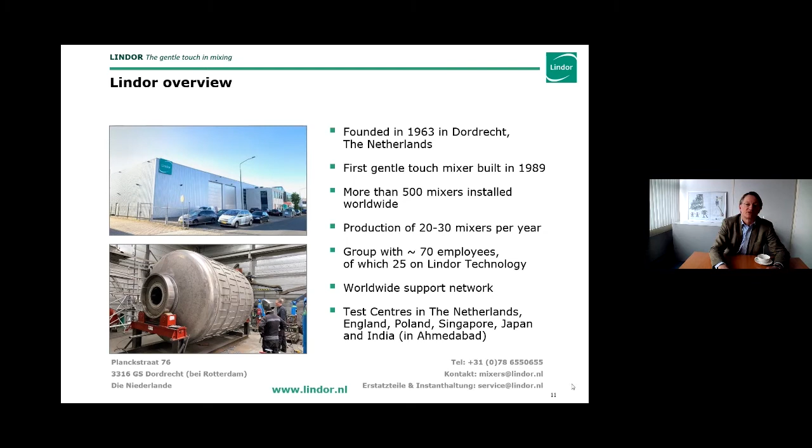What we do is cater to the food, chemical, polymers, and pharma business. We've actually supplied to all of these industries in India as well. We do flavoring, mixing, liquid dosing like impregnation, drying, vacuum drying, hot air drying, dry air drying, vacuum coating. We make mixers from very small, 10 liters - call that a 1 to 3 kilo batch - to 25,000 liters, which is like a 15-ton batch.

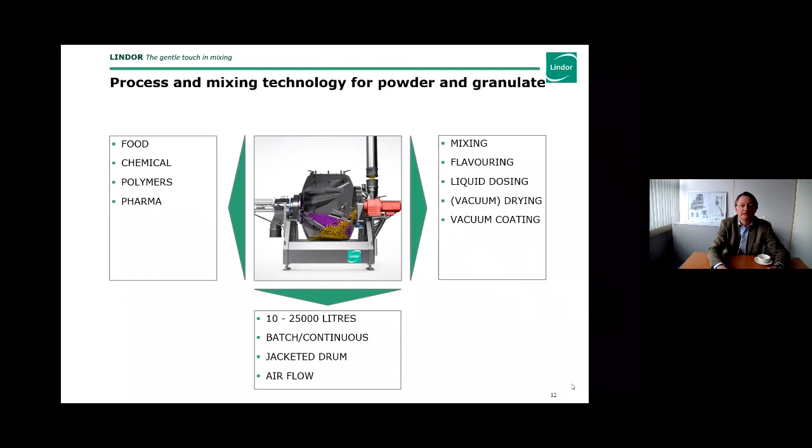We do continuous mixing and batch mixing. We have jacketed drums, airflow, etc. This is a typical, quite large mixer, I must say, 7,000 liter batch, just to give you an impression of how it works. It's a rotating drum, so the entire drum rotates. There are no moving parts inside. The product in this case is entered through the standing pipe on the right-hand side and leaves the mixer after the batch on the left-hand side.

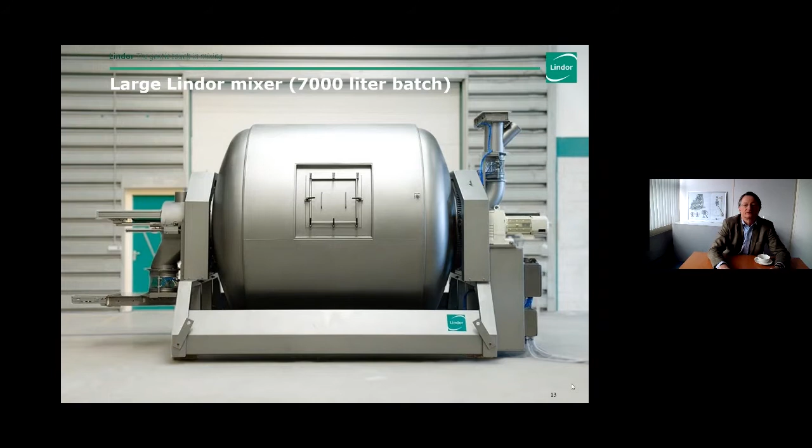So now to the presentation that I prepared specifically for this webinar: Integrity is key - Gentle mixing and flavoring of tea, a webinar for India and surrounding countries like Sri Lanka, Bangladesh, and Nepal. Tea and herbal teas, it's one of our key points in doing business.

More than 50% of all our mixers installed worldwide are for this purpose alone. Sizing ranges from a 70-liter batch to 12,000 liters of batch - that's the biggest machine we've ever installed, located in Poland, at a tea company there. We install them in Europe, and of course in India, where we've now installed around 25 mixers, not all for tea - I think it's about 8 mixers for tea, so about a third. Also Canada, Russia, Dubai, Indonesia, well, all over the world.

Talking about big batches, normally a tea mixer, the most common sizes are like 1,000 liter, 1,500 liters, 2,000 liters, and then 4,000 liters is also a popular size. One mixer was ordered as a 12,000 liter mixer that, accounting for their bulk density, comes to about 3.6 tons per batch, which is equivalent to 1.8 million tea bags if you have these single serve tea bags. In 24 hours, if you run around the clock, that would equate to 130 million tea bags in 24 hours. So in a week's time, you nearly can give the entire nation of India a cup of tea.

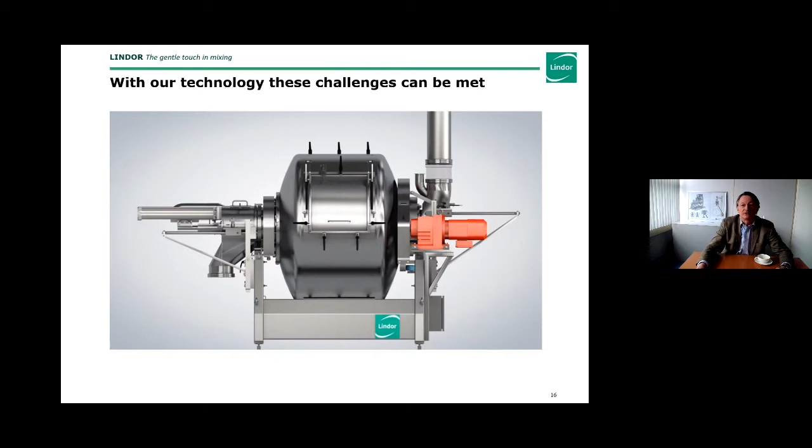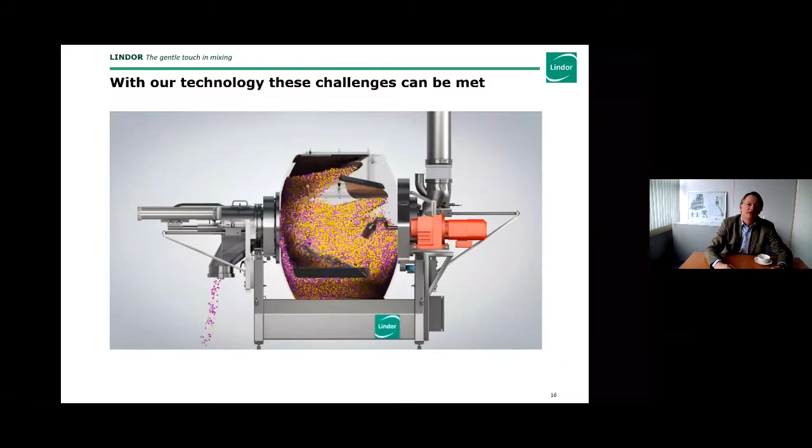So what you see on the right-hand side, the standing pipe - you see the purple powder coming in, or particles, and the yellow now coming in, and the two are mixed through this rotation effect. And after the batch, this is done very shortly just to show you, the actual product leaves the mixer on the left side.

The rotating drum is actually pumping out the particles. And because everything is always participating at all times, that results in a discharge rate of well over 99.9%. So typically less than a handful, or less than 100 grams of product, is left behind in the drum.

What you also see in this mixer is the liquid injection nozzle or device, a swan neck we call it, an armature. So there's a device in here which is the nozzle, and that can be single phase or dual phase. If you have thicker flavors, a dual phase, and through that you can spray in on the tea leaves.

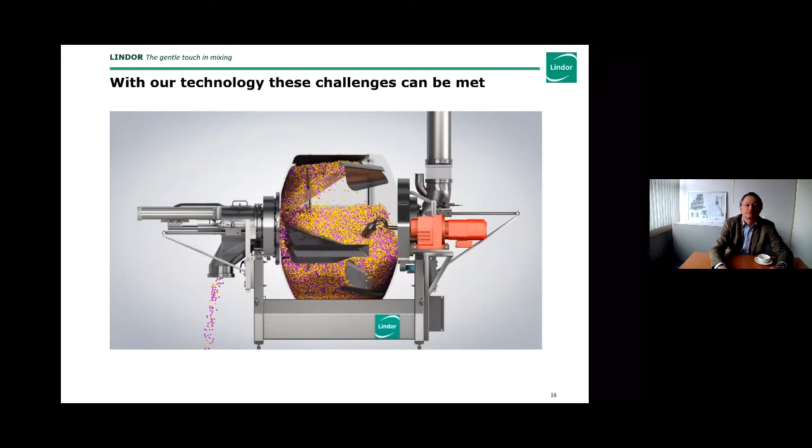Doing many trials with customers, having supported many installations with tea packers, several themes have emerged, and I've made a selection for you to discuss these.

So point one, long leaves, entangling and breaking. You have many, as you know much better than we do, different types of teas. Some are kind of easy to process, and some types are harder to process. Some of these are like needles, long needles of tea, and they can be pretty difficult to do. The second one is that sometimes other components are added to the tea, like blended teas, mixed teas with flower petals or other herbal ingredients, which may be difficult to mix.

Then there's the whole subject of dust generation and what to do with dust, which is the fourth topic, venting and dust extraction. Then flavouring, how to do that best. Sixth thing is, after the whole thing, how do you properly clean, and how do you deal with allergens? Allergens is a topic that more and more in our society is popping up and becoming an issue. And then last but not least, how about productivity?

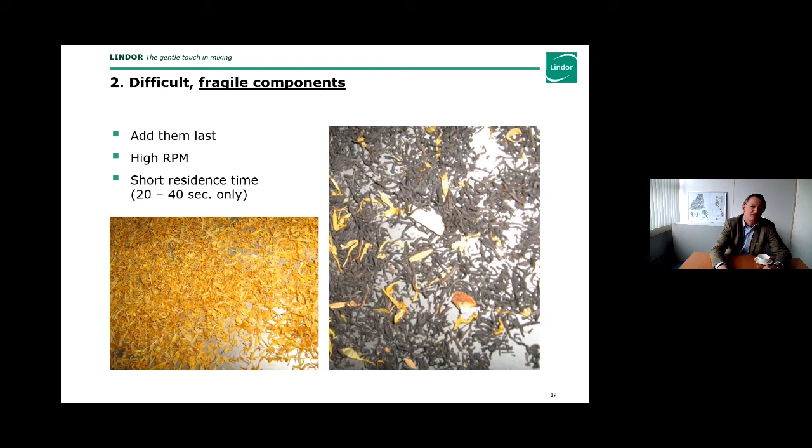The third one is dust generation, and you can have this with leaves, with broken tea, fannings. Again, because of the lack of shear forces in this mixer, the actual breakage and generation of dust is very, very low, especially if you stick to the normal mixing times. The normal mixing time for just dry tea, besides flavoring, just dry mixing of tea, is about 2 to 3 minutes typically.

Sometimes due to operational reasons, you want to continue to keep it in motion. Then you slow down the rotation of the drum to give it as little disturbance as possible, and then you can rotate for 10, 20 or even longer minutes. And still the amount of dust generated is very, very low or negligible. But the more you can avoid it, the better, of course.

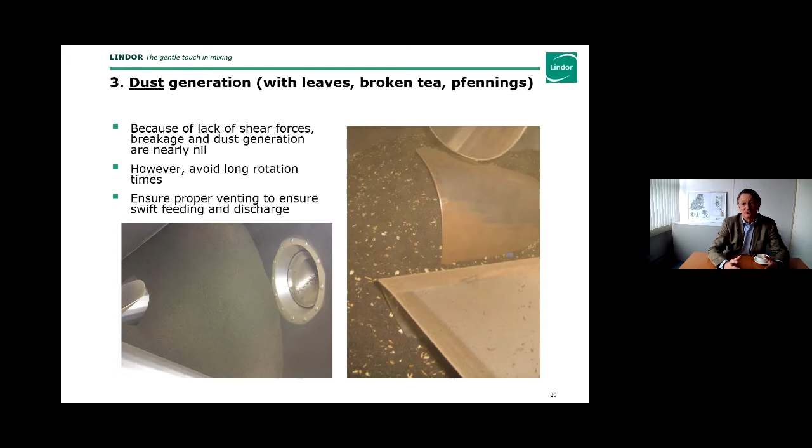What is important, and in the next slide I will show you, is the proper venting, because although the mixing system itself will not generate dust, the tea will come in with a certain amount of dust due to previous operations, or just because it is there.

So how to deal with dust and venting. When you have tea coming from a big bag, a silo, or a hopper, and you feed it in by gravity into the mixer, the tea is going to replace the air in the mixer, and that air has to go somewhere. If that's blocked or not properly installed, the tea can actually be blocked from coming in because the air is trying to push out but cannot go anywhere.

So we've made a special flange, a special connection for that, where you connect a pipe or hose to let that air freely escape. A nice solution is to connect the venting connection on the inlet of the mixer back into the feeding hopper, so the air sucked in due to the dropping of the tea leaves comes in from the mixer again. This way you create a closed system.

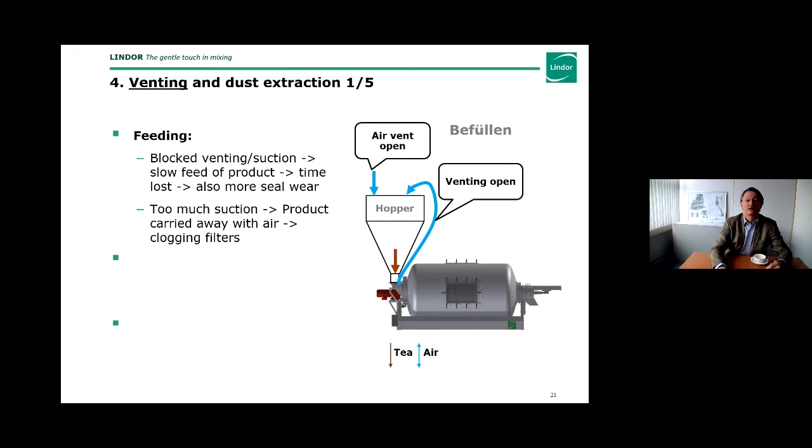You can also install a dust extraction system, which has a sucking effect, but you have to be careful not to suck too hard, because then you will suck tea with it too, which can clog up your filters. So too strong suction is not good - you can carry away too much product.

Then during mixing and flavoring, you want the mixer to be able to breathe. So there should be an open air connection, preferably back to the hopper. Also, if you inject liquid, that's also replacing air, even if not as much as with the entering of the tea. You need to make sure air can flow out with the introduction of the liquid you spray on.

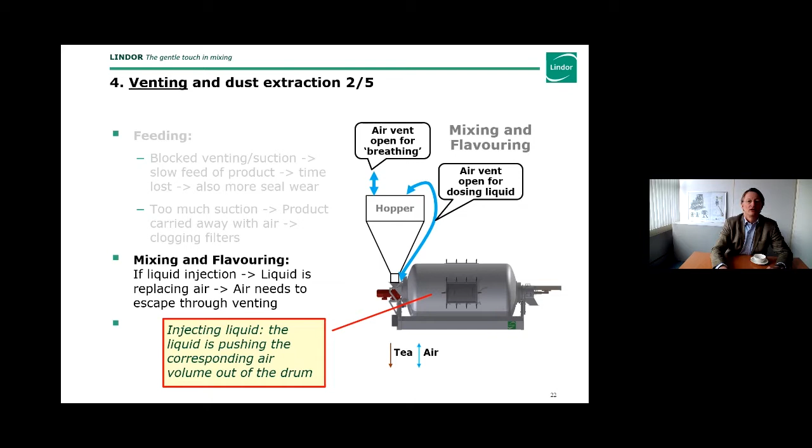The third point is during discharge. When your batch is ready, after 3, 5 minutes, you want to discharge like I showed you in the simulation, but as the leaves leave the mixing drum, air needs to go back in. You have to make sure air can freely move in so the tea can easily leave the mixer, giving you a short discharge time - typically 1, 2, maybe 3 minutes.

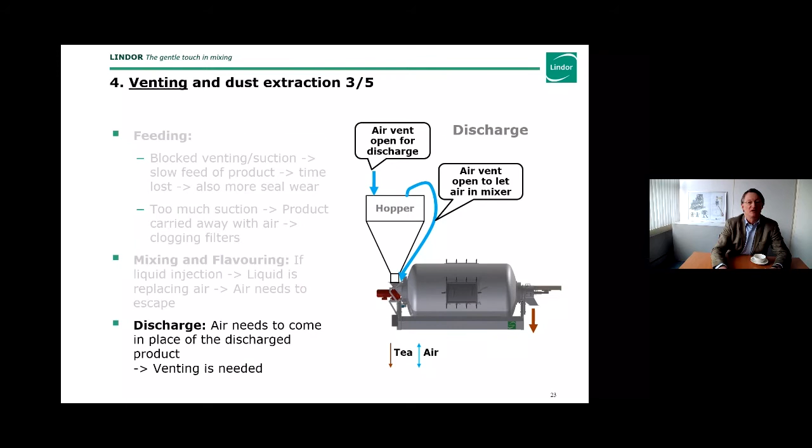Now some practical things and examples of what we've noticed. You learn by doing and by practice - we've made our mistakes, and had solutions that worked and that didn't work. We'd like to share a bit of that with you.

What you see here on the left with the blue circle is one of these venting connections with a sock over it, like a filter sock. It's a very simple solution and can work well, unless the filter sock is not properly attached or becomes clogged - then it's really obstructed and the air cannot flow out. In this case, that resulted in the tea not flowing in properly, taking minutes and minutes before the tea could fully enter the mixing drum. It was so slow in evacuating the air.

Because we could not attach any other system at the customer's connection point - they didn't want anything else there - what we did was introduce some snorkels, as we call them, to catch the air and let it flow out through another port, which was then connected to their extraction system.

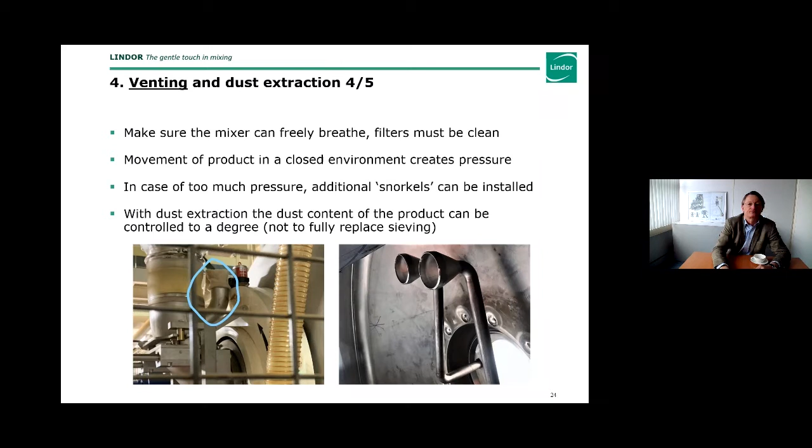To give you an example, this is how strong the air can be during charging of the mixer with tea. This was actually a tea installation in Germany.

Watch these two holes - I opened them. Normally they're plugged, and they're there to place a liquid injection system, a CIP system, or instrumentation. But if it's not there, it's plugged. I opened them to see if this venting was an issue. Watch along these arrows, and you see the air flowing out with force. You can also see dust coming along with it because of the strong airflow and high speed that carries dust with it. I was standing there making the video with a white shirt on, and I can promise you that the shirt was not white anymore after making this video.

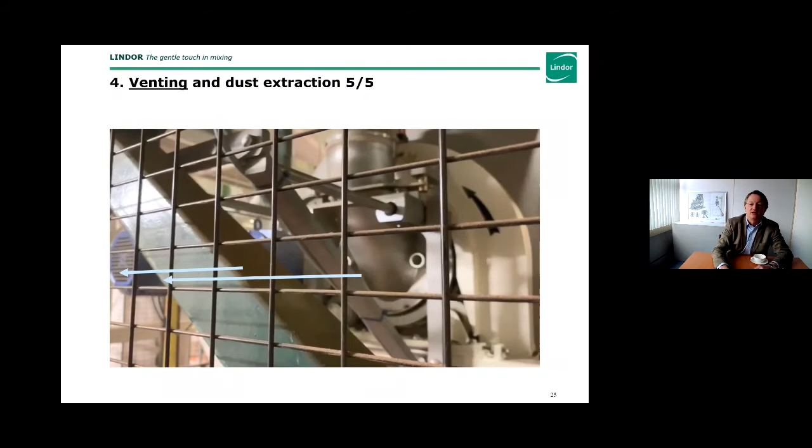Then we move on to the next topic, and that is flavoring. If you want to flavor it, you want to have it homogeneous. When you have some tea in your hands or put it in a teapot, you want it to have a nice and even flavor and aroma, and no lumps and no spots of liquid or anything like that.

You can flavor tea in two ways, apart from having the flavorful tea or other ingredients with their own flavors. You can add to that either liquids and or a granulate. Sometimes it's done both, sometimes it's one or the other.

With liquids, the characteristic is that it can offer a taste and it can offer a fragrance. So if you then open the tea, or even with the tea bag, before you consume the tea, you can already smell it. With the granulate, you have much less of the fragrance, but the taste you certainly have. The taste is actually encapsulated in these granulates, and when the granules hit the hot water, the taste opens up. You can do also a combination of both.

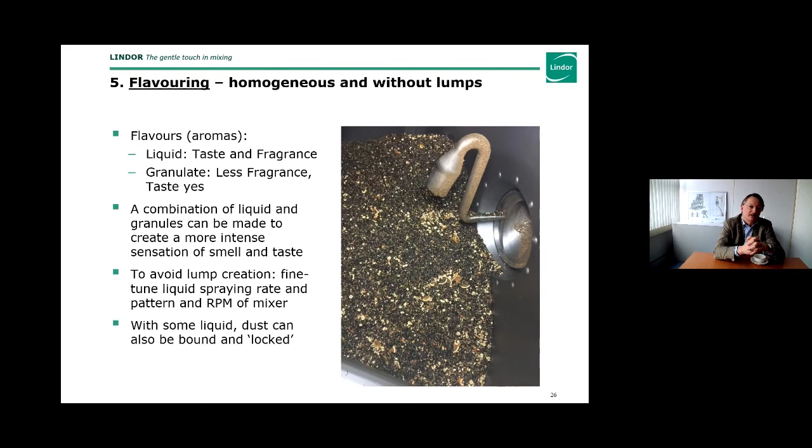Both can be done in our mixers, of course. To avoid lump creation, which is not difficult at all, make sure that you have the right speed of the mixer, not too slow, and a nice fine mist of a spray that can be fine-tuned, spraying only on the tea itself and not on the metal parts in the mixer. That's a matter of alignment and adjustment that we typically do for our customers, so you get an excellent result.

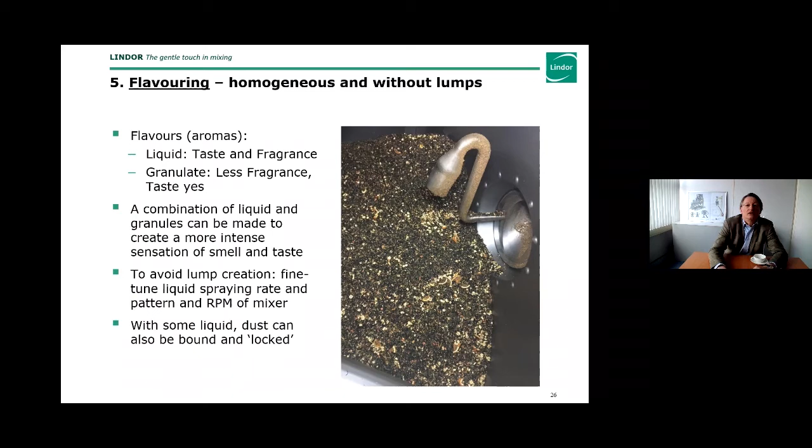Then cleaning and allergens, different ways of cleaning, just light cleaning between batches. If you schedule your tea, it's easier to first schedule the light flavors and the light teas and go stronger and stronger, so that at the end of that campaign you can clean it. Then you can dry clean or you can wet clean.

Dry cleaning, you use a brush, an industrial vacuum cleaner, and we can make a port in the drum where you connect a vacuum hose so that you can wipe or brush the tea in that direction and it's actually sucked out, and you can finish it with wet wipes.

It depends also if you use flavoring, liquid flavoring, then more cleaning is maybe required. Wet cleaning even, you can do it manually with warm water and detergent. Three stages: pre-rinsing, then a detergent clean, and afterwards post-rinsing.

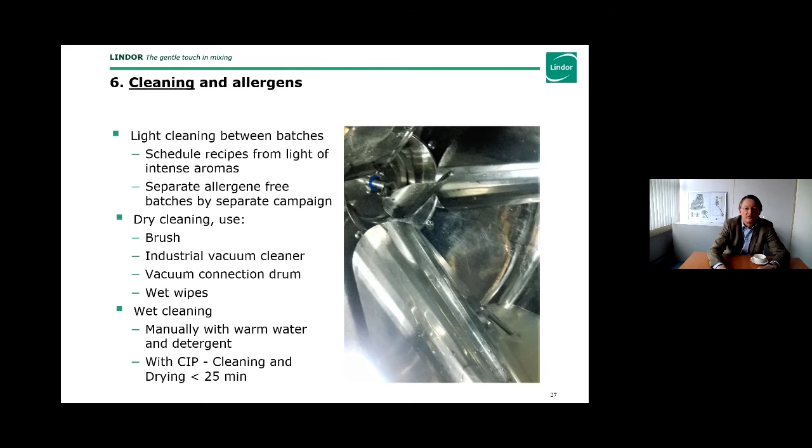Or we can equip the mixer with a complete automated CIP system with spray balls in the drum, in the inlet, in the outlet, with a hot air or dry air drying unit on it. You can have an automated cycle and have the whole thing cleaned and dried within 25 minutes. So productivity-wise, that can be a very good solution.

Talking about productivity, our mixers with our customers do up to 8 batches per hour. It depends also a little bit on the size of the machine. 8 batches per hour can be done by a 500 liter, 1000 liter, 1500 liter mixer. If they become bigger, then the number of batches can go down a little bit. It depends also on the material handling automation before it, how fast you can feed, and how fast you can take away the product that's discharged.

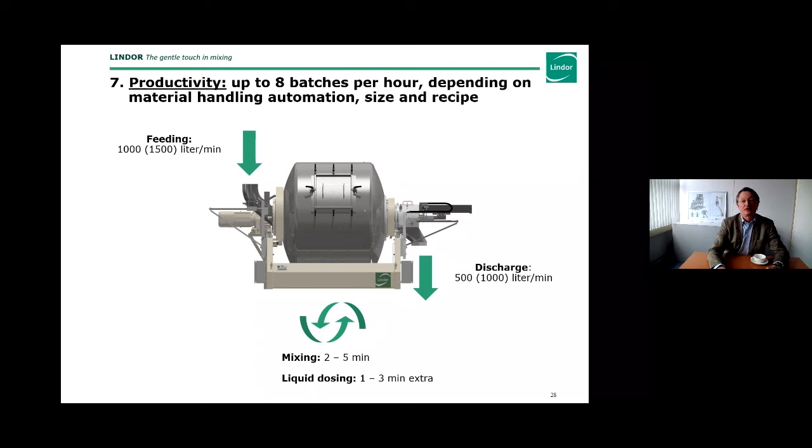Feeding typically goes to the tune of 1000 to 1500 liter per minute maximum. The mixing is typically 2 to 5 minutes. Liquid dosing can add 1 to 3 minutes to that mixing time. Discharge is typically 500 to 1,000 liter per minute. So the mixer can be very, very productive, but it obviously also depends on what kind of line it's built into. And also we can make highly efficient material handling systems.

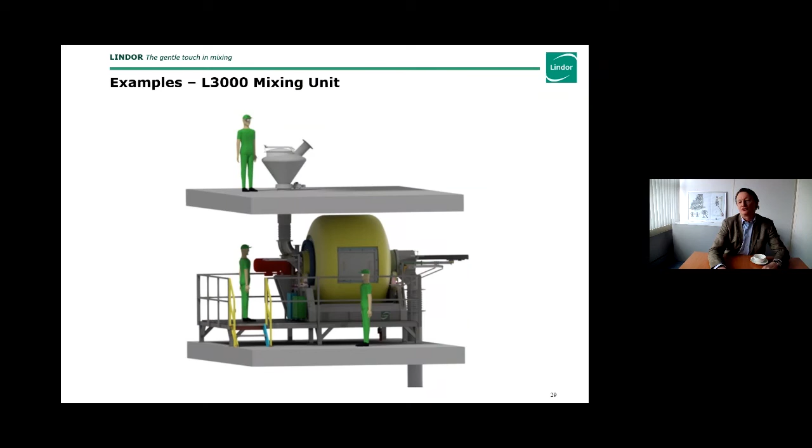Productivity can be very, very high. So some examples of installations. This is a 3D impression of a 3,000 liter mixer with, on top, the entering, the tipping cabinet for a product, then the mixing, and then the product goes down to a packaging unit or a big bag filling device.

This is an actual tea mixer in Europe. I can say it because we've published a small article on it. It's a Lipton installation where the black tea is mixed for tea bags, fannings. It's a 4,000 liter mixer with a dual discharge for dual weight big bags. And that's been operating, I think, for 10 to 15 years now.

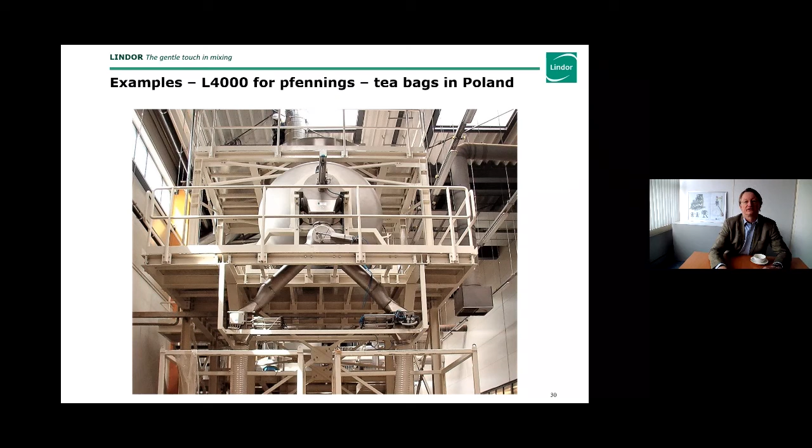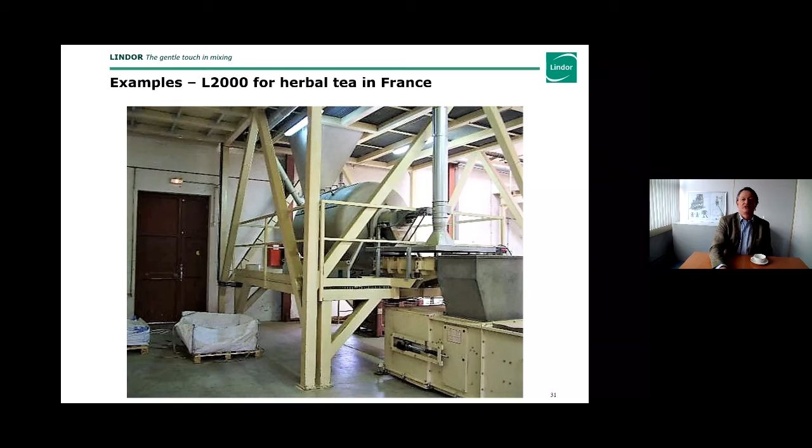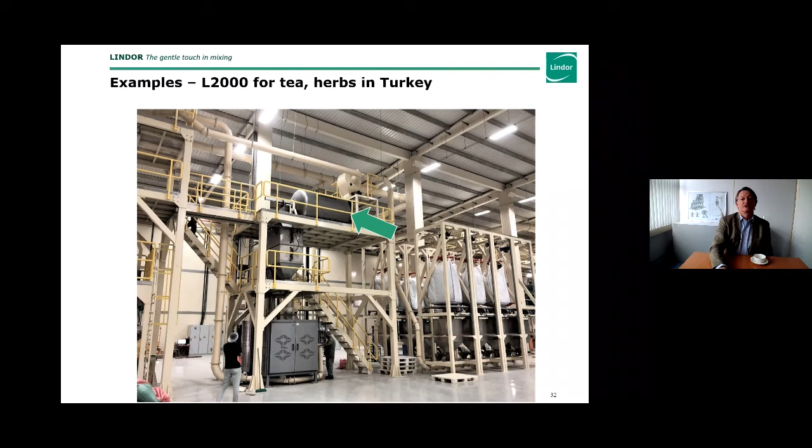Another one, an old mixer, probably 20 years old, 2,000 liter mixer for a known supplier in France of herbal teas. That's a very loyal customer as well. This is a more recent installation for herbs and tea in Turkey, a 2,000 liter mixer. They recently ordered their second one. There is the mixer, in case you've missed it.

How long do our mixers last? I was talking to a customer actually in America who was interested in a new mixer. We had supplied him 2 mixers 20 years ago, in 2000, 2001. I was talking about India and doing this webinar with him. We had a friendly talk, and I said, yeah, it's interesting because we even can sell mixers in India. Well, we are really much more expensive. I wouldn't say we're expensive, but our mixers are more costly than some of the local competition.

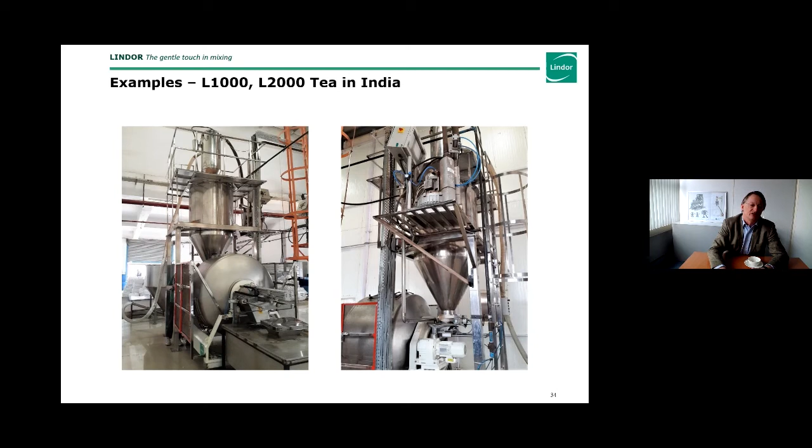And he replied simply with, yeah, no wonder, because your mixers, they last 30 years. So it's an easy equation. I hadn't thought of it like that, but that was his comment. Our mixers last a long time. They're simple machines, easy to maintain, and they don't really wear out.

It was all about the tea. The tea quality depends on the leaf quality that you have, your recipes, and of course also on your process quality. So that is what I wanted to share with you. If you have good equipment and a good process, then it all comes down to the quality of the tea you put in, and you can generate a beautiful cup of tea, which I'm actually enjoying as we speak. Thank you very much.